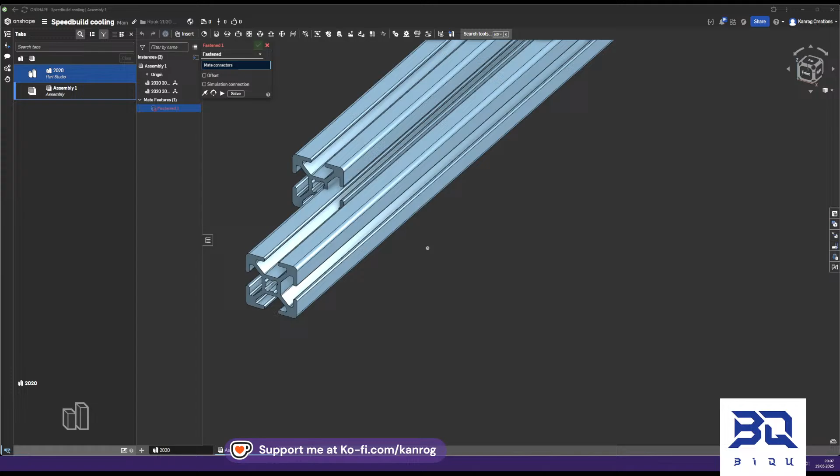Hey Jeffrey. Yeah, I'm talking.

Right now I'm just working on setting up my frame, because what I'm designing needs the frame to be there, so might as well just start with that.

And that's the wrong way. Let's tilt that way.

So first couple of minutes should just be a case of getting the frame set up, and then I'll start designing some actual parts.

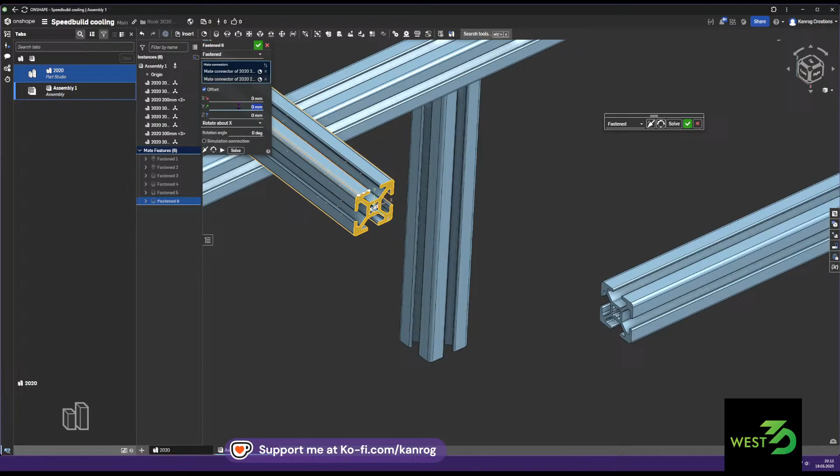The CAD is set up for perfect tolerance, so unless you can actually print perfect tolerance, you would need to adjust it. So I'd probably add a little bit of tolerance into the parts, but that should be trivial to do.

I usually design with zero tolerance, and then get that set up later.

I only have a couple of printers that can do the perfect prints, so you're not alone. Oh, dang.

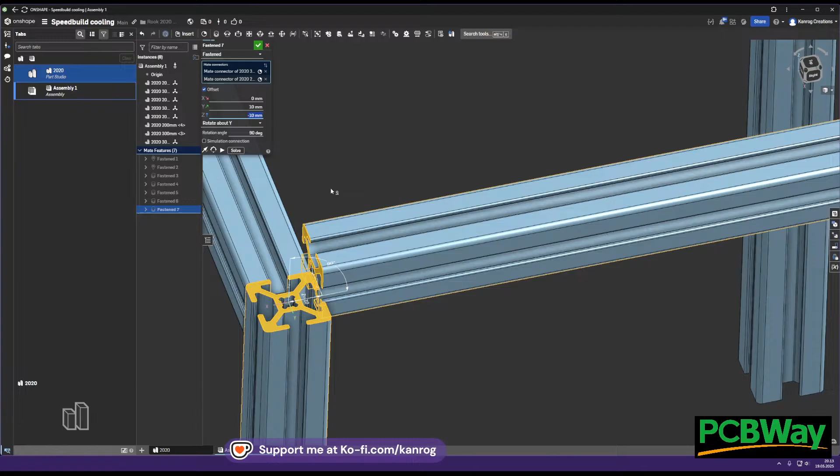So this is just a Rook frame, it's 200 by 200, but this particular Rook I'm working on right now has 300 millimeter Z extrusions, so it's a little bit taller.

That is pretty much all I need.

I don't often print tall, but considering the price difference when you're self-sourcing a Rook to go just 10 or 50 or 100 millimeters taller, I just prefer it. It's almost free print volume. Going 100 millimeters taller is almost doubling your print volume for next to nothing in price, so to me it just makes sense.

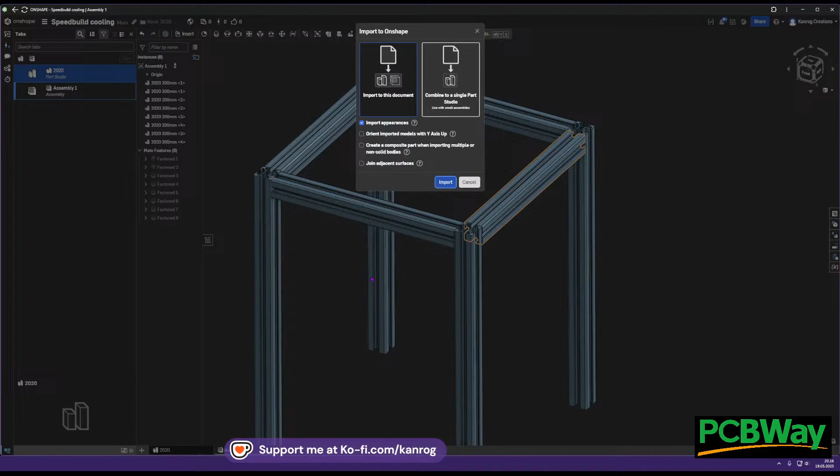Oh, that Rook for your niece sounds like a really fun project. The Rook was designed to be easy to build and fun to learn from, so...

Alright, so where is... let's just try to. I just want to reduce how much information is here.

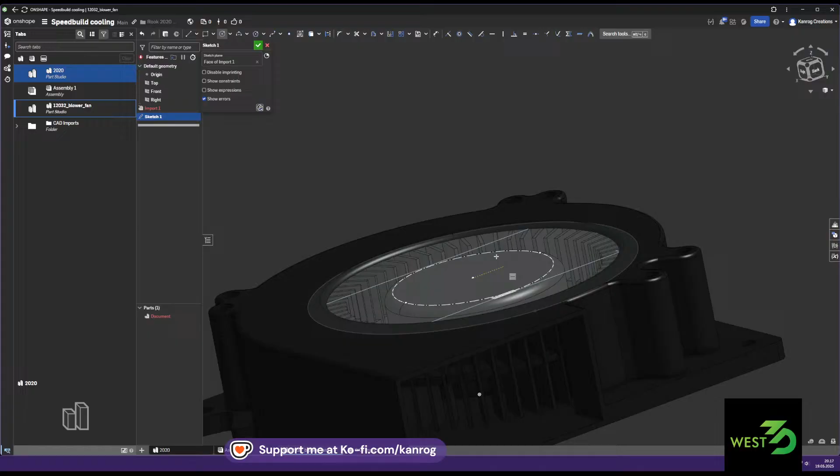I use a couple of different purples depending on the build. I've been using some LDO purple ABS, Form Futura PLA and PETG. They have kind of a, what is it, yeah, some sort of a dimmed down purple that I really like. It's what the printer I'm working on right now is printed in, that PLA actually. They have the same color in PLA and PETG, and I really like it.

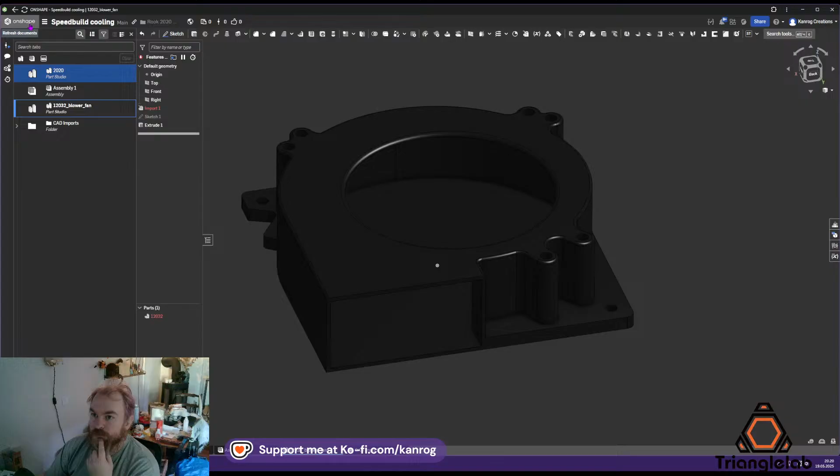I did build a purple and green Rook. That is amazing.

Let's see, I just want to figure out what happened to my camera here. For some reason it's just not working. Oh, it turned itself off, that's what happened.

So CF or GF filled, I haven't tried any other color than gray and black in those filaments, but if you want to build the ultimate Rook, that is what you need. My best and most reliable Rook is ABS carbon fiber and PET carbon fiber, it's just a super strong filament.

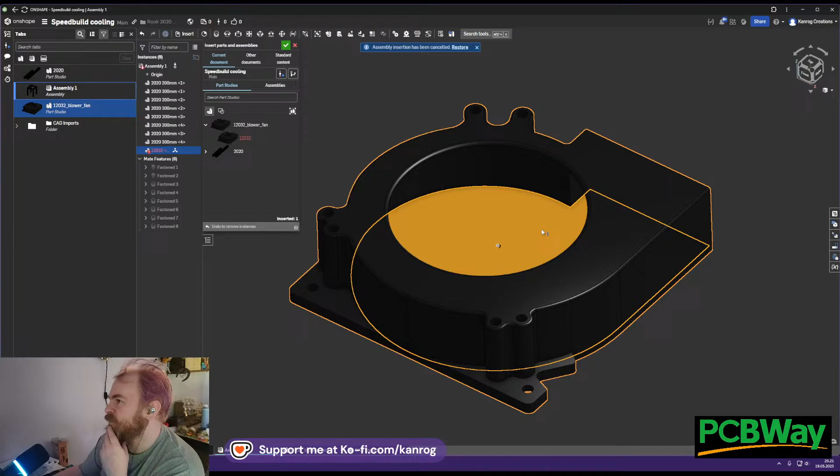Yeah, let's find another blower to put in there. Let's just delete that one.

Hey Nexus, how are you doing?

Demoing some Mexican tile, that sounds like fun. Hey Jeffrey.

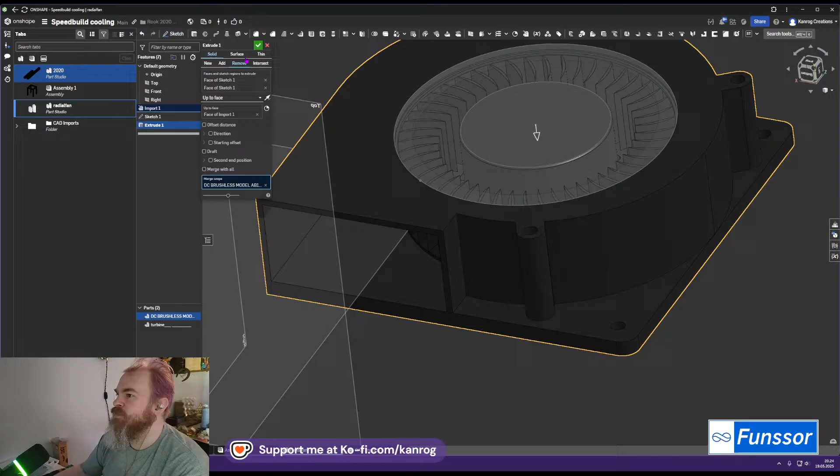Oh, well, that would simplify everything. I should start looking at stuff before I do anything. Yep, let's just rename that.

Hello, robot. How's it going? Lurking at work, yeah. Just don't let your boss catch you, I don't want to be the reason you get in trouble.

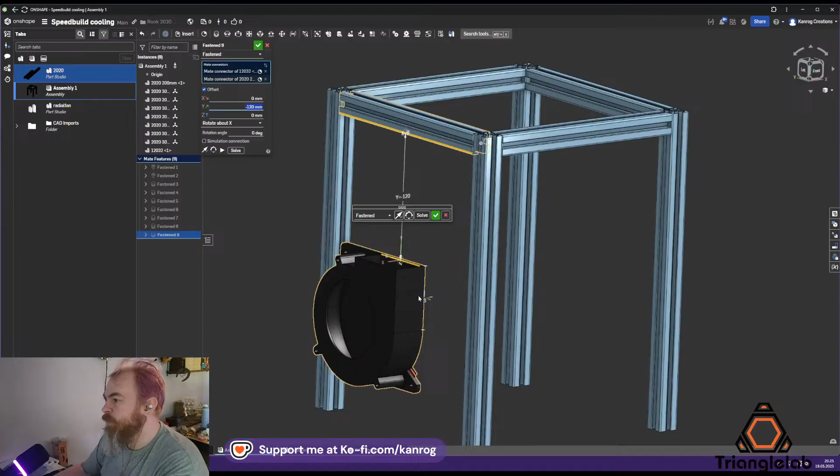So let's just do this. So what I'm gonna do is make a mount for this blower onto this frame, but I need that mount to be height adjustable because I want to fine tune the height of this. And then I want to make a duct that stretches into the bed as far as possible, but without getting in the way of the hot end that's going to be there. So let's start by just making that mount.

Blower mount. And that would be just a simple rectangle. Some screws, and then some screw holes, of course.

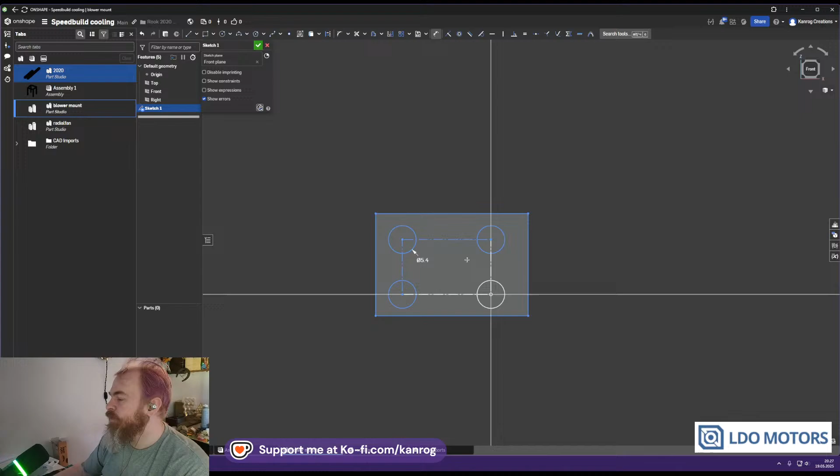Let's make this guy just always 10 larger. So that one's always going to be 10 larger, and that one's hopefully just going to be 10 larger too. And let's make that into like a... how big should that be? 5, let's make it 4. I can adjust that later.

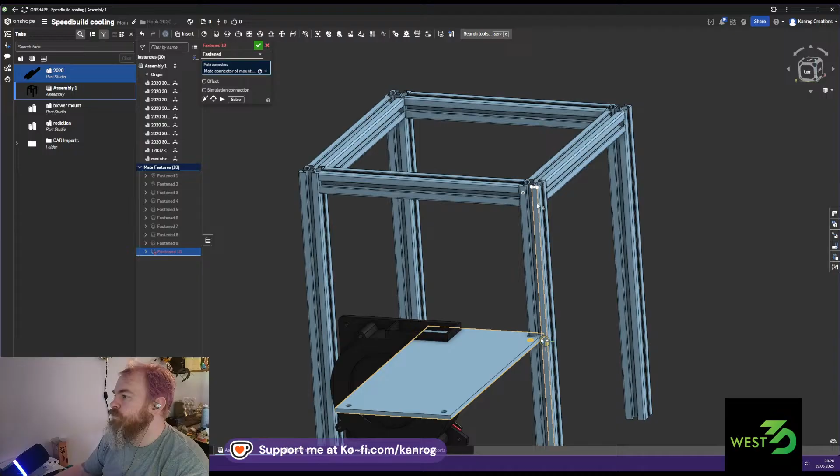Let's put that into our assembly. I think that is the run. There we go. Let's just pull that. 150, nope, wrong way. Okay, so do 20, that's close enough.

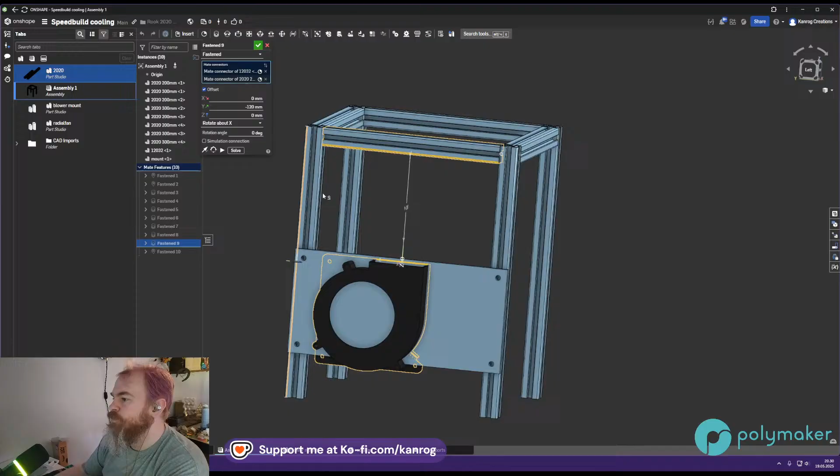All right, let's move this guy. Let's get this guy set up for some actual mounting holes. Let's see, how big is that thing? 120.6. So if I make this guy 130, minus 20, plus 120. This will make around 30 in total.

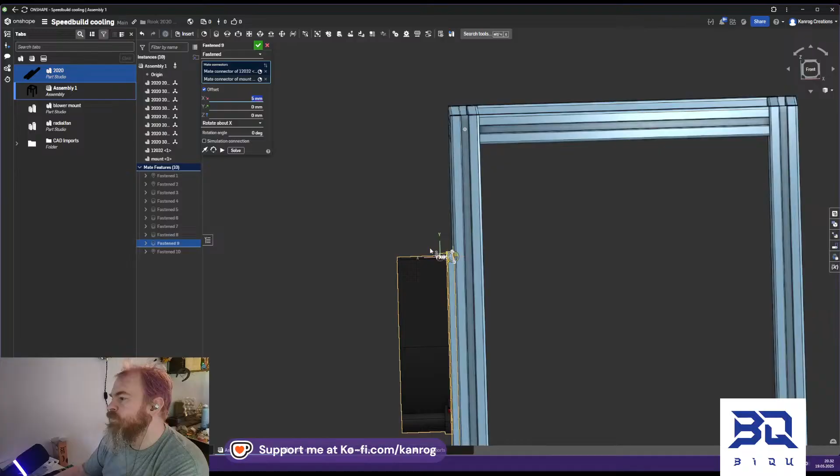And then let's go back and mount this fan to this panel instead of that guy. Yep. So I can shorten that by quite a lot, by about 20.

Let's actually bring this down to 10, 12, that should give us some room. That way I can make this just one piece and a piece that adapts to whatever cooling duct that I want to make.

So now I can go into this guy and edit. Let's get the mounting holes in. Those will be just M5 bolts, because M5 threads into these fans. So I'm just gonna make them 5.6.

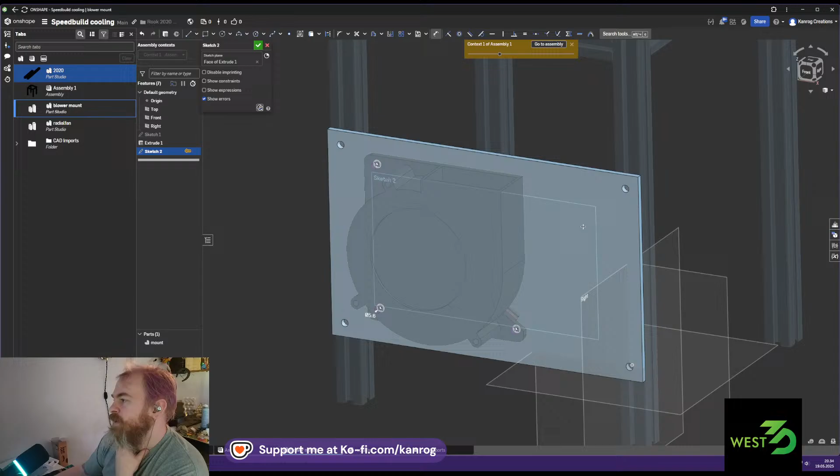Now, does this thing need to be this big? No. Am I gonna make it this big? Yes. Because it'll help with the rigidity of the frame, because this is going to shake it like crazy. But I can shorten it. Let's go here, let it update, and go back.

So I'm gonna make a mount right here for the cooling duct, and it's gonna be multiple pieces.

Hey Viking, yeah, it's going good. I wanted to get back into streaming, and I'm also back to making videos this week, so that should be fun, I guess.

Let's see. Let's get those two contacting each other.

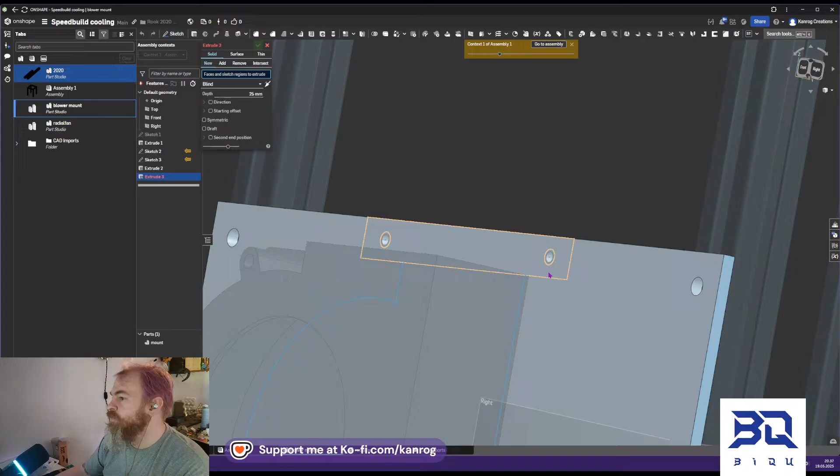So I'm just gonna punch through those things. Let's get that one back, and then extrude that thing, but as a new part. Actually, let's make that blind 5mm, because that's what I need to get the heat sets in.

Do I have a, what's the sketch? The sketch is, oh yeah, those holes. They're never punched. Okay.

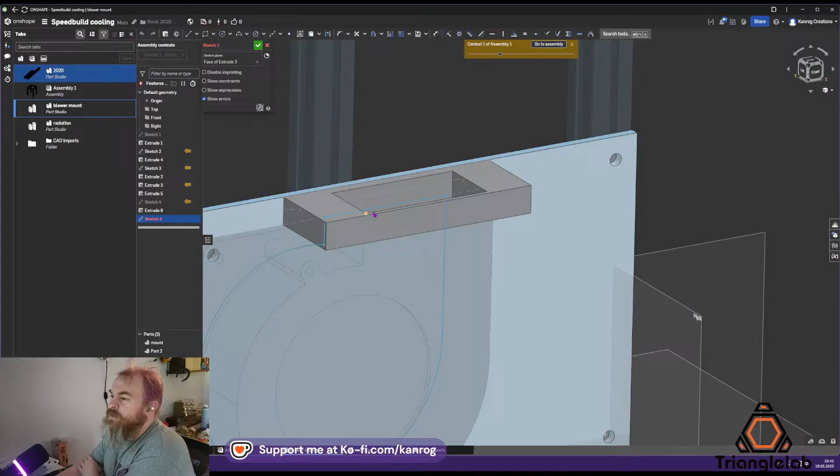So my plan was to just attach this thing to this thing, and so I just need one. Let's see, let's get this hole right there. And how big is that? That's 4.3, so I could put just M4 straight into that. So I'll just design some. And I know that I want to get that to 8. Oh, let's do 10, just looks a little better.

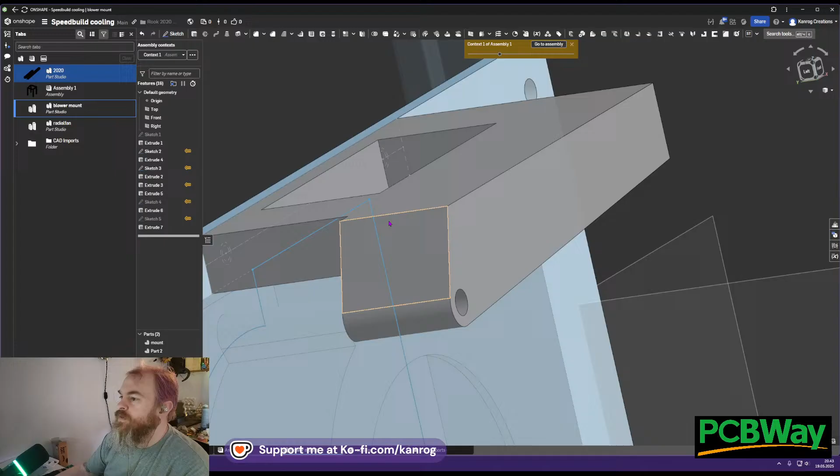Get that one in there, that one in there, and make those two the same, and then they're gonna be 4. There we go. And there we go. Let's make that like 4.

Now that's a simple part that I can print that will attach or hold that duct in. I'm just gonna keep on with that guy as the mid part.

Actually, I'm gonna make this part here thicker by a lot. That gives me a 3rd point of attachment, so I can do this. Yep. And then I'll put in a circle there, and a circle there. And those would be 4.6 for heat set. Yep.

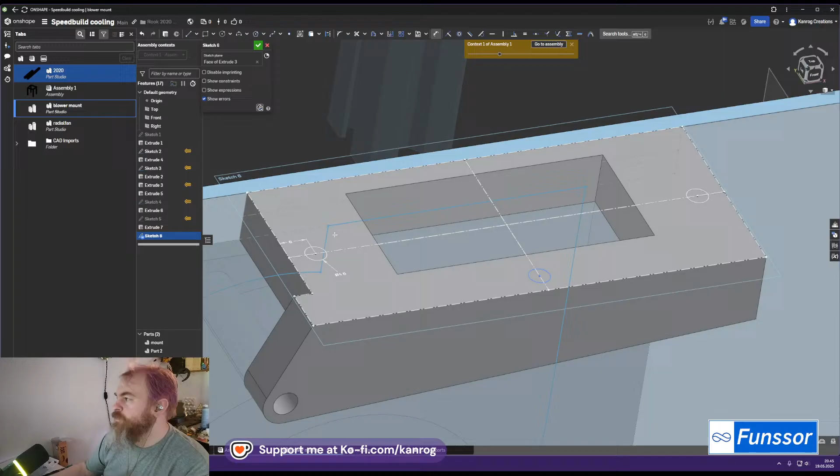Okay, let's make this into something that looks a little better. First of all, let's just make that nice and pretty.

Now I want to make this guy. It's very Rook-like, just not adding chamfers to this. It's just very Rook-like, but I just can't make myself do that.

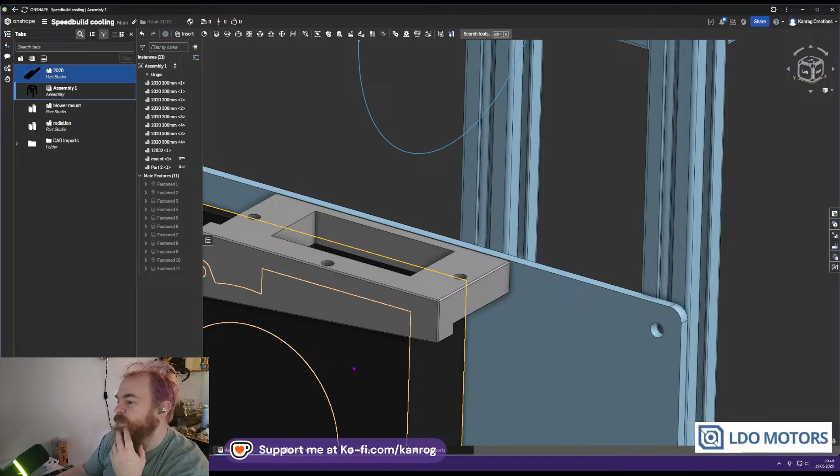Let's make a new part studio just for the ducts.

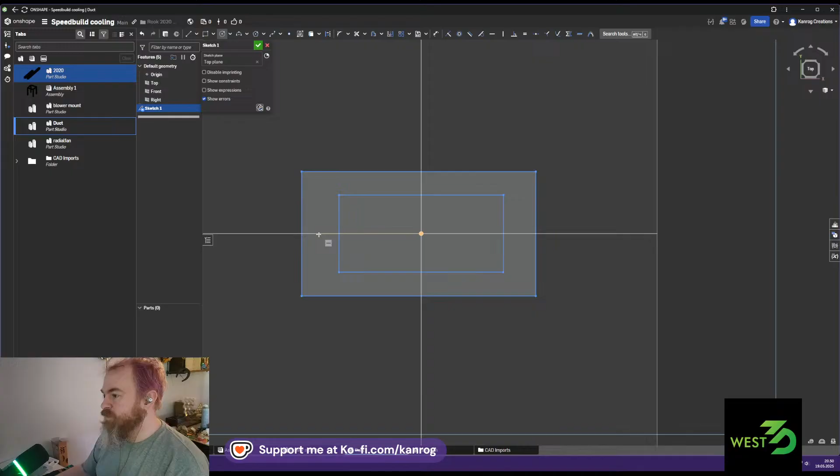I'm really pleased with the rook, just in general. It's a really fun design.

Let's get this guy set up.

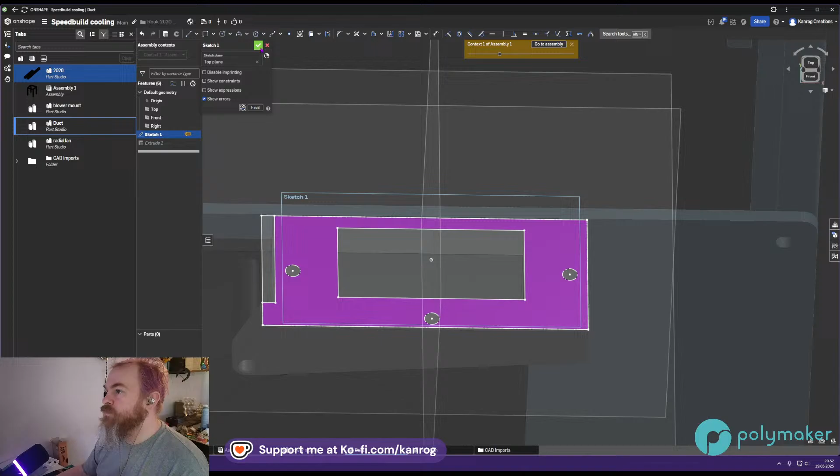I did something wrong there. What I should do is use that. Gonna just do that instead, I think that would give me a good result. There we go. So now I can make that one fit to that one instead. That one fit to that, one to that one. And then here I'll just make a new line. Yep, that's better.

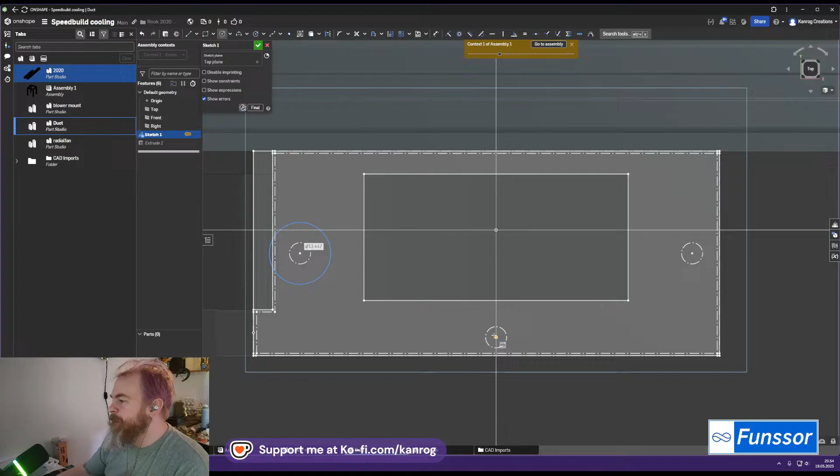Yeah, beard both longer and more gray. It just keeps going gray, nothing much I can do with that. Hi, by the way, Nutty. I wouldn't say lost weight, I'm just eating better. I've been eating better lately, or not lately, the last year or so.

So two, so that'll give me something to just bolt into that. And then, just because it makes everything easier, I'm going to do this.

Thanks for the compliment.

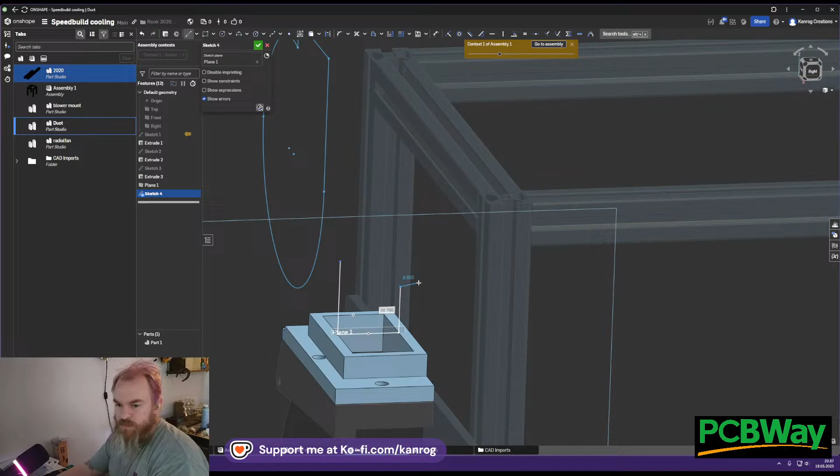I have another mount that is compatible with the Rook. That's how I did mine. But yeah, that's something we could look at when we get to redesigning, if we do that at all. We're not sure yet.

Okay, let's get some measurements in here. So from there to there, let's go 25, we can actually go 30. And then I want the duct to start up here, 40, and I want the actual vent exit to be 10. So what I need to do is make a nice curve from there to there, and I want to make sure that the air goes straight out there. So I'll do a 15 and a 10. So now all I need to do is connect those two and make a nice arc. Connect those two, make a nice arc. So let's do that.

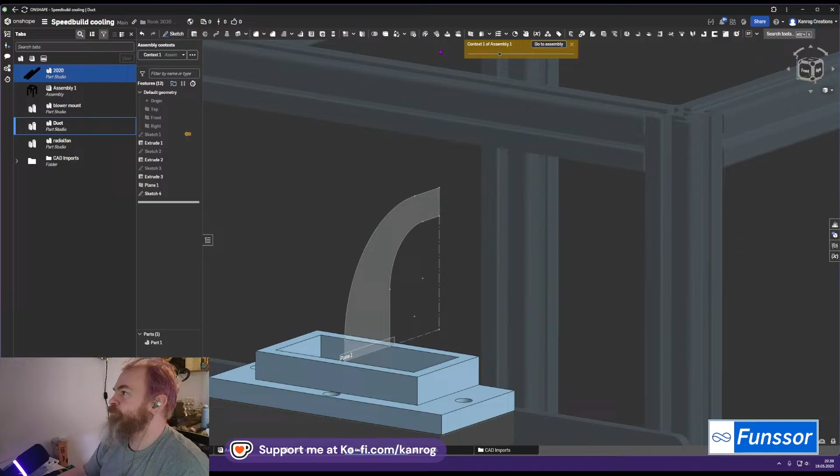There's a couple of ways for me to do that, but this is the simplest way that I can think of. Just do that, then put that and that on there, and this guy, let's make it 100 - the bed is 120. This will just make sure that I get nice coverage. I can probably make it even smaller, just because it's gonna force itself out, spreading.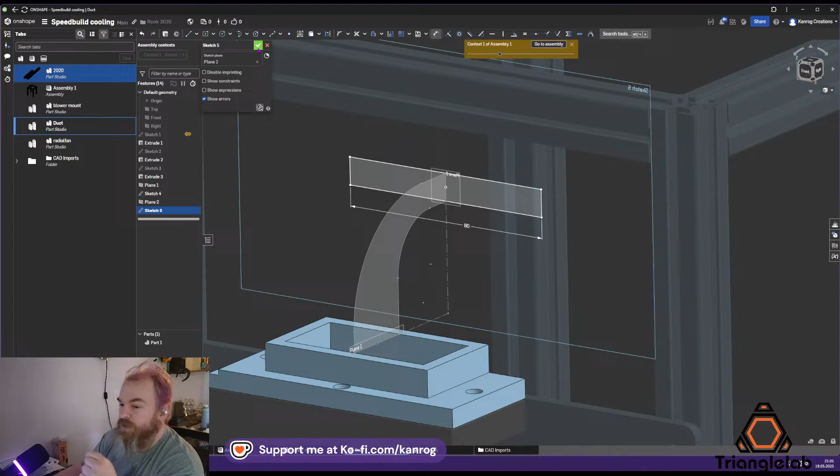Status with Pegasus is kind of limbo at the moment. I don't have the parts or the energy to build mine, so CAD is pretty much there. There's a couple of places that needs tolerance adjusting, but the CAD is there. The main issue people have with the Z-belts are the apex clips, and that's something you can solve by making your Z-belt clip, the actual apex clips, slightly thicker. I've been experimenting with it myself, and I had to get mine from the stock size, 2.9 millimeter, and I got mine to 3.2, and I can lift anything with that. So if people are having issues with the apex clips, they just need to change that.

Just thicker clips - it's all about your flow tolerance on your printer. All right, so I need to get that one connected to that one, and that is probably where I'm gonna end up.

This is a visual guide for me to help me see where the duct's gonna end up looking. So now I can just make a loft between that guy and that guy. And let's add in some good looking profiles. There we go. No.

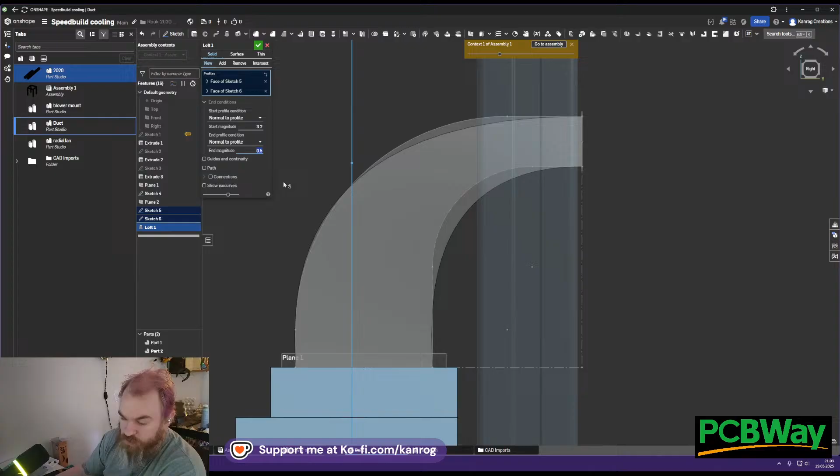Let's do 3.2. I can actually shorten down that one. 0.6, 0.5. Yeah, so if you want to be smart, just print the exact number of, or a couple more, clips that you need at the stock size, and then go up 0.2 and then one more, up 0.2, and see how they fit. If you get them right, you can lift the printer from that stuff.

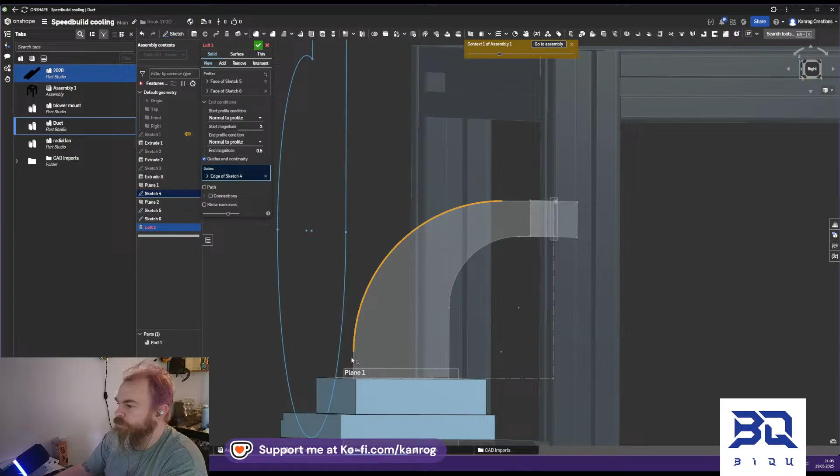3.53. No. Let's see, can I match? No. Let's just do that. I do like that shape though. It ends up just looking really weird. Yeah. Nope. I like that. Might be.

Yeah, so that is my path. So I'm just gonna make this guy. Oops. Go away. I'm gonna make that just bright red, so that I know that is my path. So I need to make something that's bigger than this.

Yeah, I don't really do CFD. I haven't felt the need for it. On this guy, it's brute force - I'm just gonna use more fans. There's gonna be 3 of these on this printer, so... and CPAP. So on this guy, it's more just brute force.

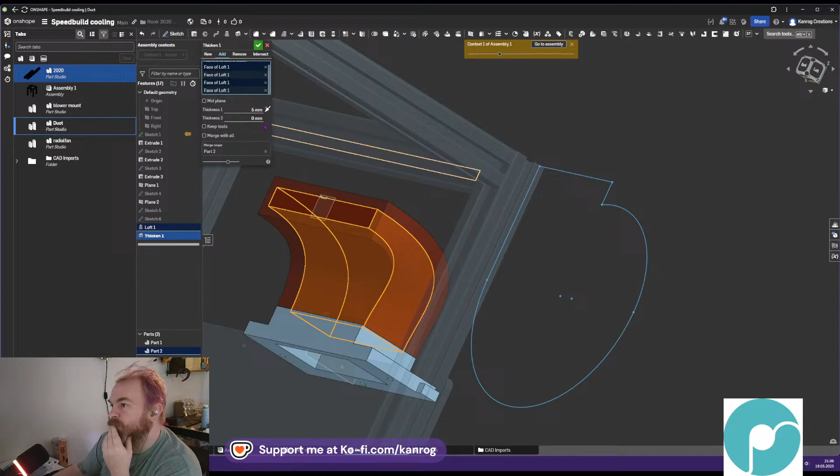So should I just... I could do that. That'll be difficult to print. Actually, not really, no.

So if I now do... I never have issues with adhesion. On this guy, it's probably gonna be an issue, but I do have glue that's powerful.

So I can now grab that one and just add them together. That is not a difficult print at all. I mean, I could just fill in this void. It'll be support free. Should I maybe do that? Super glue, yeah, super glue would work well.

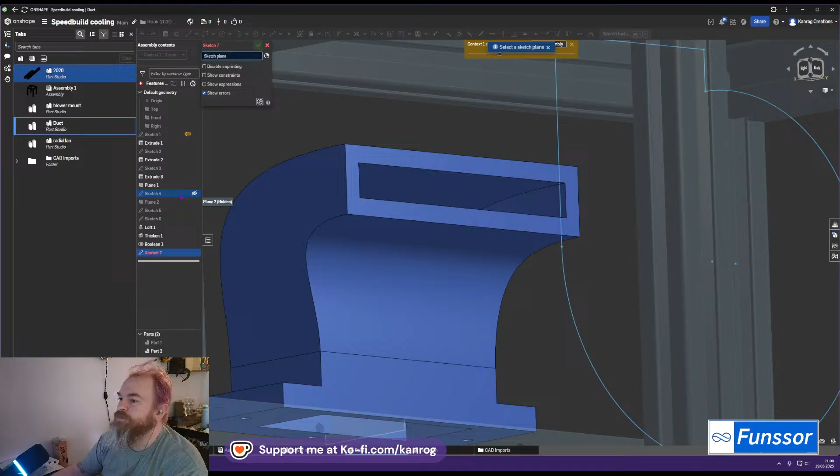I have a couple of types of bed adhesion that does work really well. So I have this plane still. No, not that one, that one. So what I can do now is I can just fill in that, and then up the face.

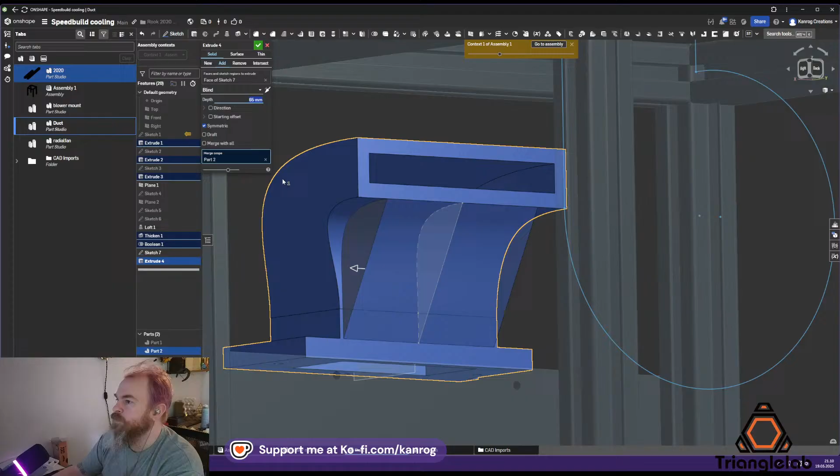I'll do that, and then have fun with them chamfers - make it look fun, doesn't have to be boring.

I feel like this duct is very un-Rook-like, there's a lot of curves and stuff. I'm almost tempted to just build something around that duct. Then again, this would be so much easier to just print and use it.

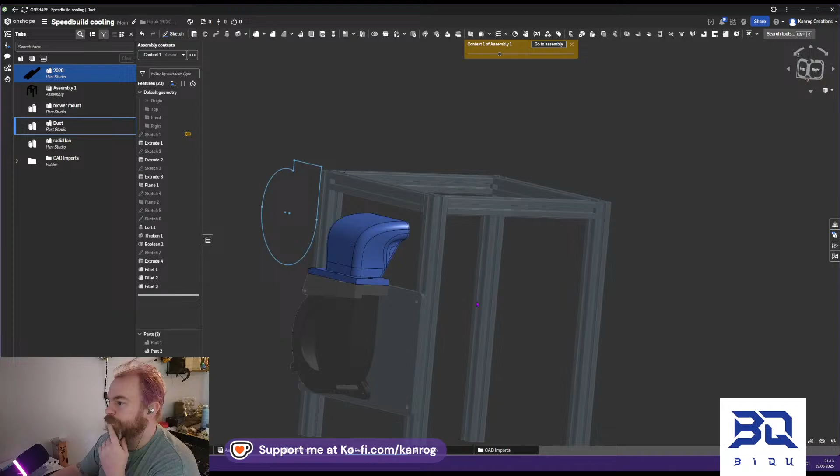That is looking really good. I could probably just reinforce this connection a bit, but I don't think it's going to be an issue. That'll be nice and easy to print, standing up. So I can do all the chamfers, make it nice. Chamfer everything - oh yeah, of course that one doesn't work.

Oh yeah, house renovations are not fun unless you really are a psychopath. I did have fun when I did it, but I am a psychopath, so...

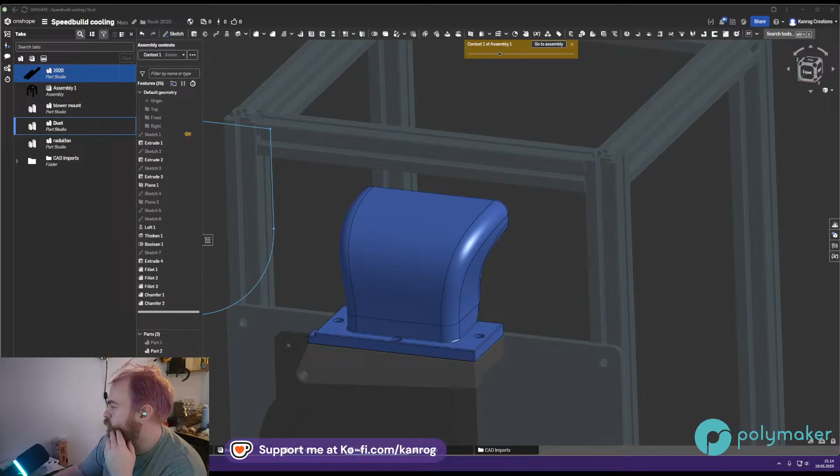Okay, not that. All right, that looks good. All right, that is looking good.

So I'm doing it this way with this extra adapter, just because it's easier to mount things together and get a nice seal. And then I can adjust this duct if I want to - I can just add stuff to it later on.

So for printability, I should probably add in a couple of things on the inside here. Let's do that. Let's make a new plane point.

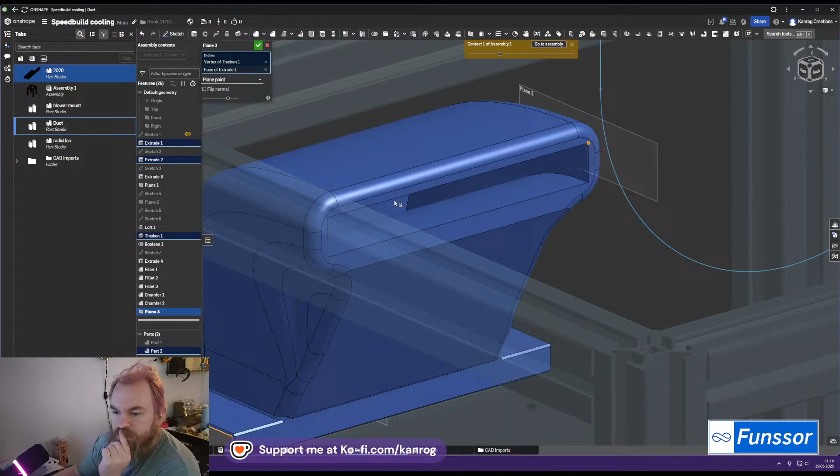Oh, that's interesting. I don't actually have one flypie light, so I might try that then. Not that setting up a flypie is difficult for me, at least. It's routine, but that's interesting. I'm gonna have to look at that.

Hey Jeffrey, welcome back. The painful part with a duct is finding out the right height. The thing about this printer is I have a lot of room getting everything up and down correct. I don't have to worry about the top at all because the hot end sticks down to about here on this rook, so I can slide this entire thing up and down super easy.

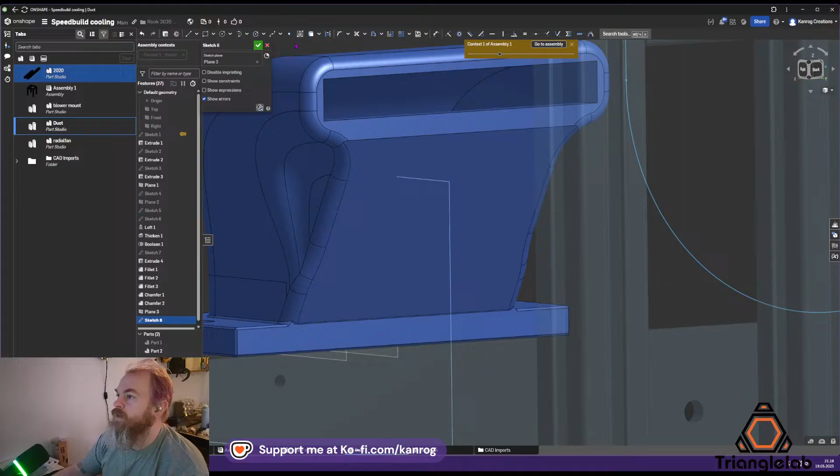So what I'm gonna do is go in and find that plane, and just make offsets from that. I'm gonna make one offset from that plane. Now 25 is gonna be too much. How about 15? Yep. And then I can start sketching on that and just add in that, and that, and that.

Hey, shrimp farter. What kind of speed? Well, all of it, hopefully.

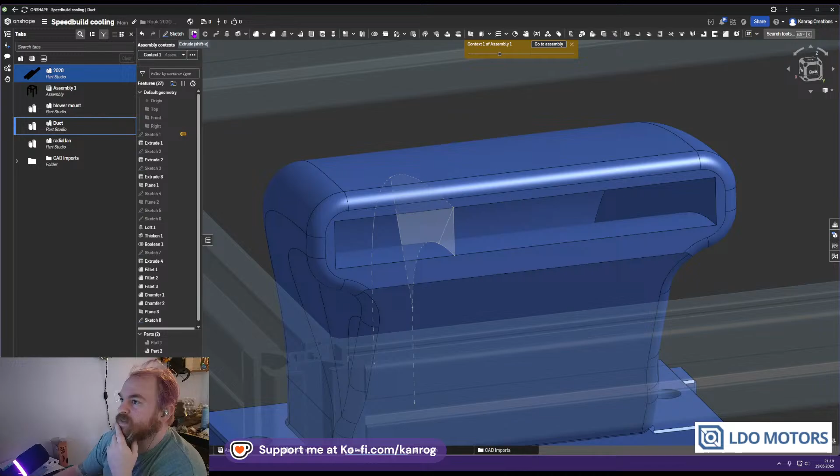The goal is to get within 2 minutes. I'm currently at 350 on this rook, so if I can get under 3, into the 2s, I'll be happy. It's gonna be difficult, but I don't think it's impossible. I have the hot end to potentially go faster, so if all my experience is telling me anything about the parts I'm going to be using, this is probably going to be limited by the actual rook motion system for once. It's probably the first time it's ever going to be the limit, which is fun.

Is it just me? Is there a... No, it's not. I thought there was a gap there, but there's not a gap. Let's mirror some features then, and mirror it on... where's that plane? No. There it is.

That should make it easier to print. And now I'm thinking maybe I should just add that feature a couple more times.

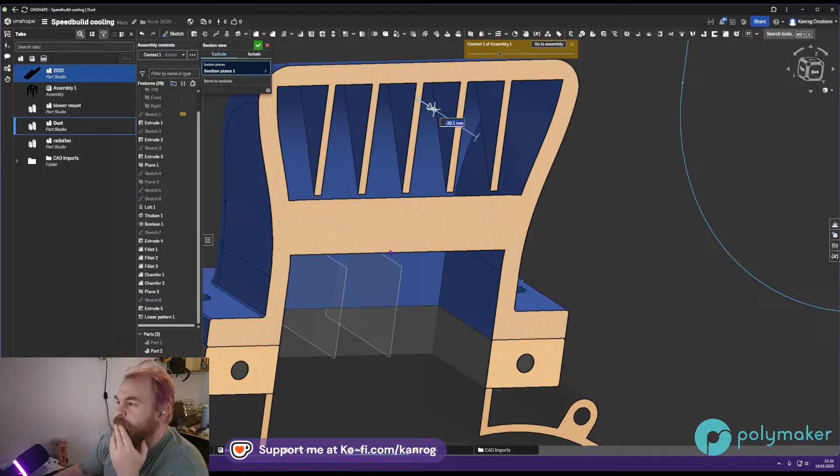Actually, let's see here.

Wasps are not fun, but in general, if you just leave them alone, they tend to leave you alone. So...

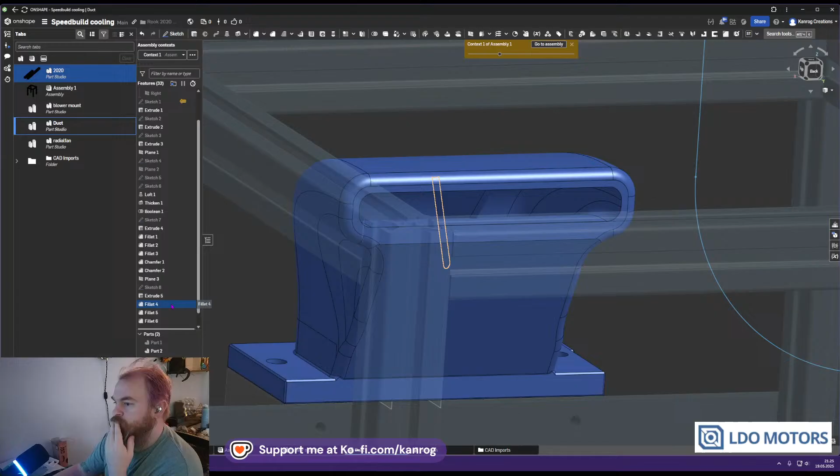That'll make everything easier. Why doesn't it give me the features? Oh, okay. I guess I'll have to add them manually then. Oops. There you go. Now that looks better.

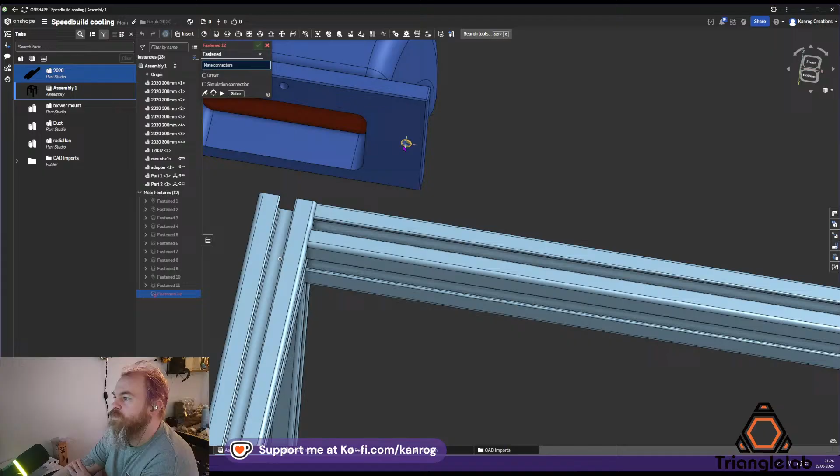So how's this gonna look then? Let's put that thing in. Oh yeah, this. I need to fix this issue right here. Oops. That needs to be solved, but that's pretty easy. I can smooth this out a little. Or do I care at all? That's the issue, maybe. Okay.

Let's try this. I'm not sure exactly why, but it's mostly a taste thing, and Fluidd has a bit more technical built in.

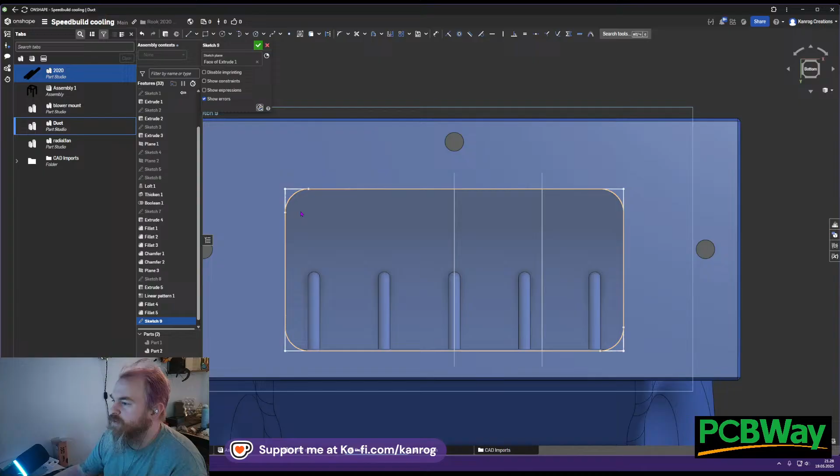Mainsail is just more smooth in its use. Why? I don't know. I don't mind using either. I'm perfectly fine using both of them. So let's...

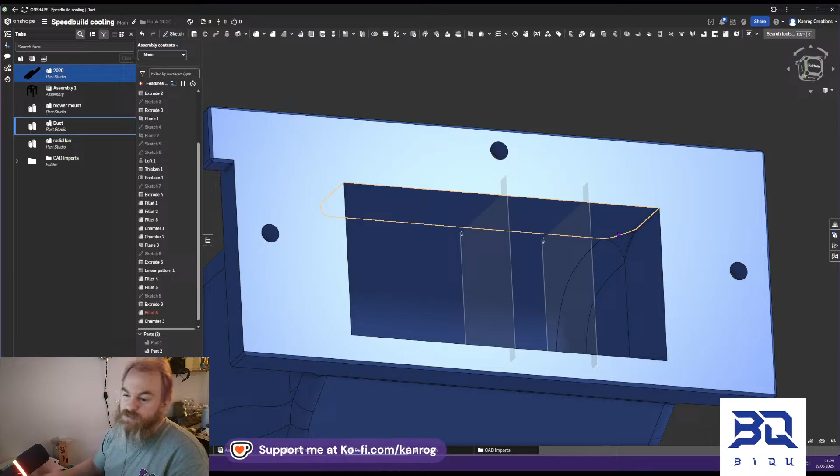I get where you're coming from. It's a little bit different, yeah, but it's not hugely different. It's still the same base functions, still just Klipper. Fluidd has some features that make it better, especially if you're looking at the text editor that comes in Fluidd. It's been way better than Mainsail for a while. Mainsail is catching up though. They've updated their editor right now, so you have the features on your right. I don't have a printer... actually, yes, I do, I can pull it up here right now.

Hey, Rollo. Yeah, Fluidd's had that for forever, more or less. That's what made it kind of sort of special, I guess, that and the fact it was a little bit more laid out.

So I'm not sure if this... I'm just checking a printer on my other screen here. Yeah, this one doesn't have it. You see, this one doesn't have anything on the right side of the screen. But I'd bet if I update mainsail on this and mainsail config, it should update. Let's just do it.

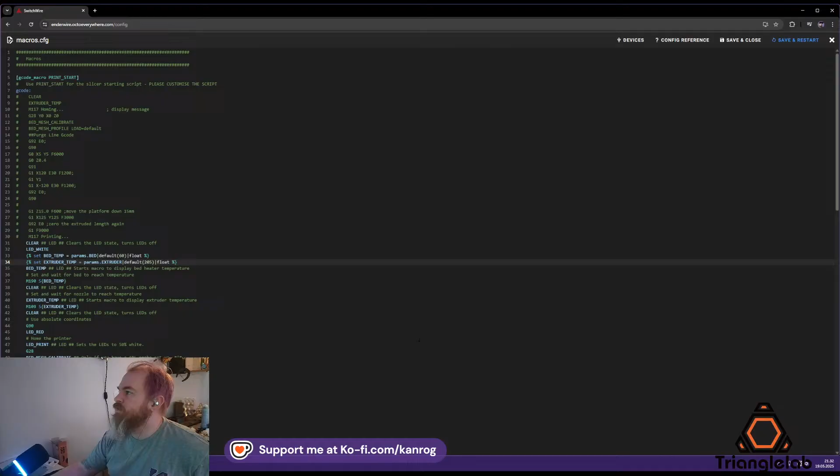So let's look at this. Still not. Maybe I need to update the web client or just Klipper itself. Here we go. So now all the sections have a list, so you don't have to scroll to find something, you just have it here. If I look at the extruder, I can find the pins - it just makes it easier to navigate. Fluidd's had something like this for a while. 10 out of 10 update. I do agree, yeah.

Ooh, let's add some printability to this. And I don't want to chamfer this edge because I want it nice and smooth on the connection. Yeah. Not sure what I wanted to fill in here. Well, let's just use it for something that I wanted to do. So, all right.

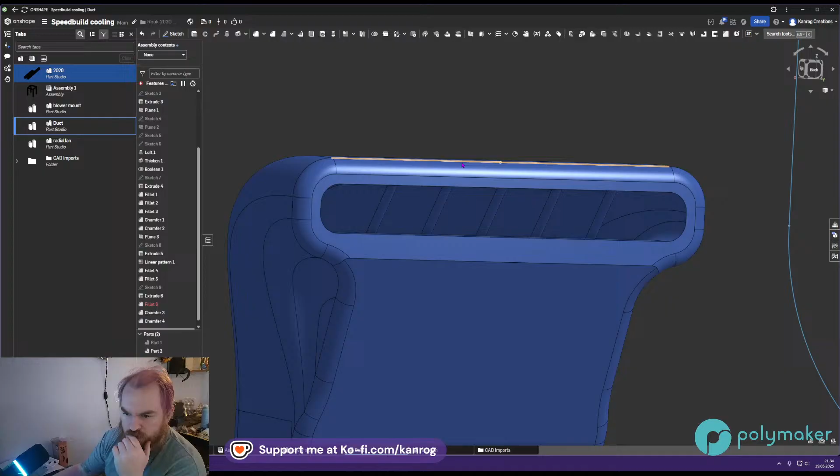Mainsail was first. Well, that makes sense. It has been, Mainsail has always been like the one that people use. I think Fluidd is more like the Linux of Mainsail front ends.

One thing I just realized is that this thing is way thicker than it needs to be. It's 5 millimeters thick. It doesn't need to be that thick. How much of my work am I going to destroy by doing this? Not a lot.

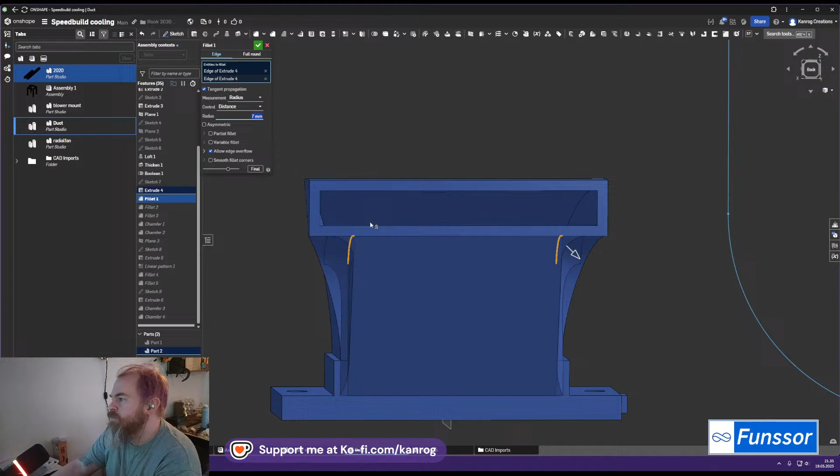Oh, there's no contact here anymore. That makes sense.

Let's see, that guy and that guy, 60 degrees, that's okay. These guys can just go bye-bye. Oh yeah, that changed a little bit. This guy needs to be tiny. Actually, not there at all.

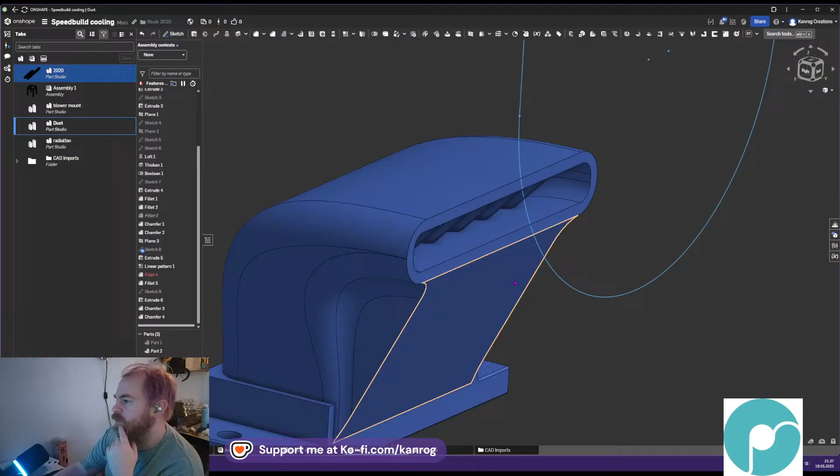Yeah, you can just use the section view, so you can go through your design this way, or you can just select another face like this one, go through it. If you want to go top down, then we can select this guy. So this way I can see how it's going to be when printing.

And I might add in a hollow piece here just to save on print time. Might actually be a good thing to just add in that hollow to make it easier to print. Or do I actually care? That's another question, I guess.

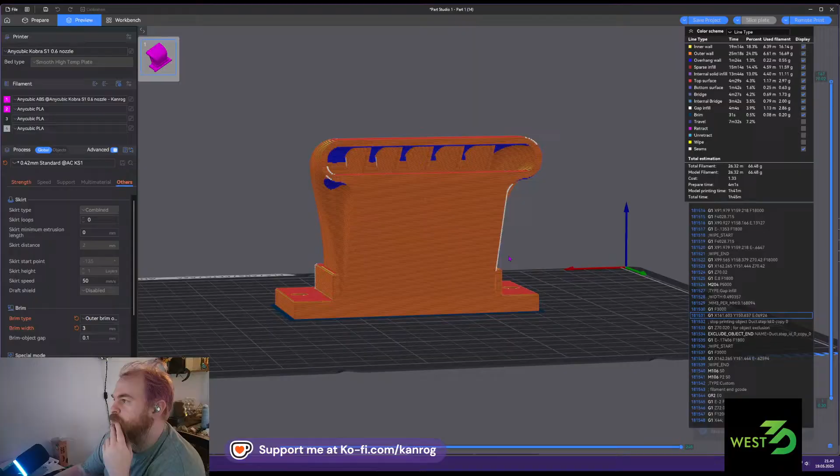Let's see. It's set to ABS. I'm not going to print this in ABS. I'm going to print it in PLA, but I just want to see how it looks like. Yeah.

Nice and simple overhangs. So if I now go to set it to like 4 walls, I want to keep the infill at the bottom there. So I'm just going to add a modifier. Let's add a cube modifier.

Move it up. Oops. And that one should just give me 0% infill.

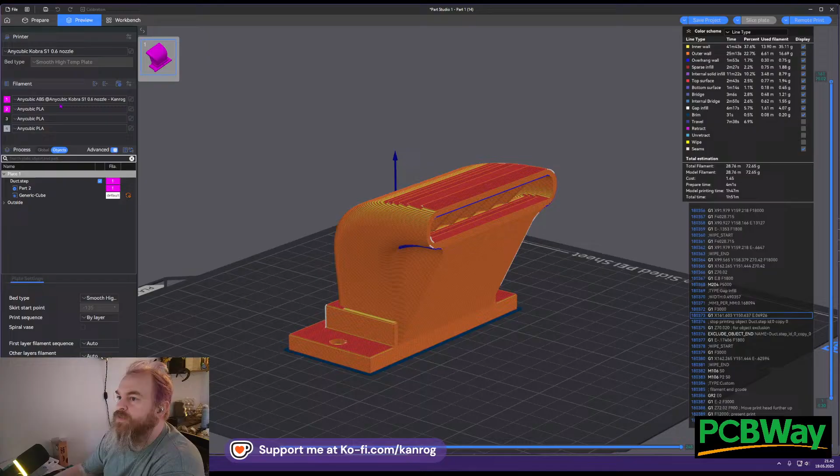Yeah, that's pretty much perfect. You nailed it, Nutty. Nailed it. So I'm just gonna have to load some PLA into this guy and then print, I guess.

Fans, shroud, exit bottom. Oh, you mean these guys?

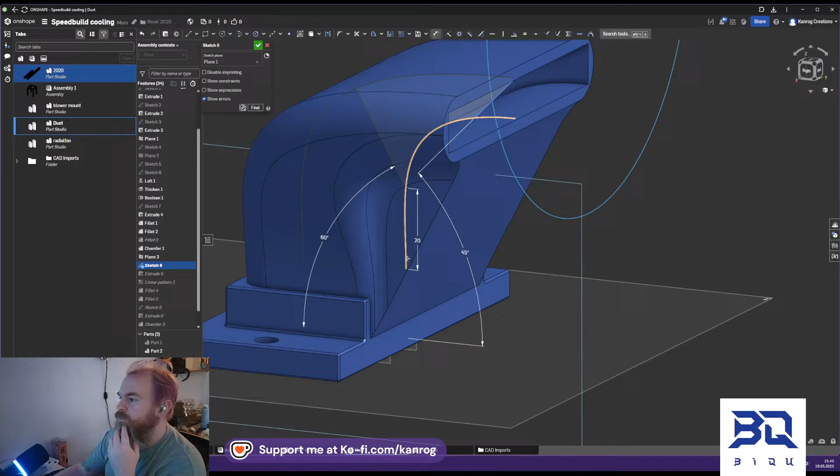Fix this. Yeah, hold on. Let me just quickly fix this. This just annoyed me. There we go.

Just to be safe, let's get the new part in instead. Yeah, that's gonna be fine. Yeah, that'll be completely fine. But I'm gonna get the new one in instead.

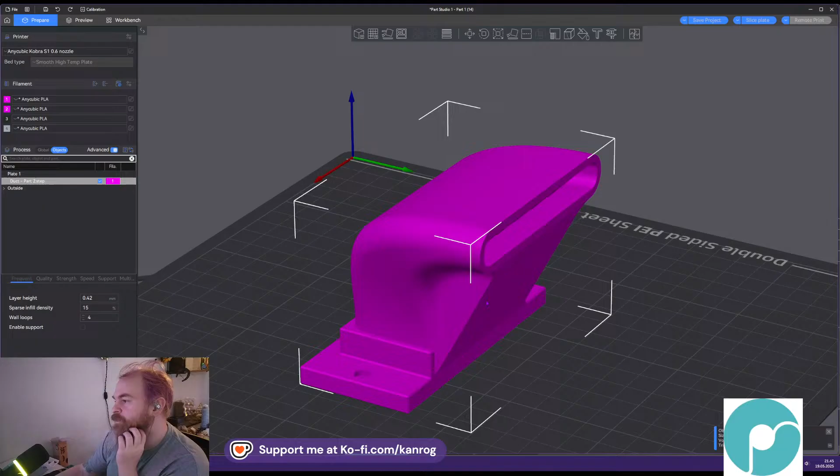And then add a new modifier to that. Don't show again. And 0% slice. Yep.

All right, that looks like what I needed to do tonight. So I'm gonna go play some video games, and print this, and also need to print the panels. Let's have a look.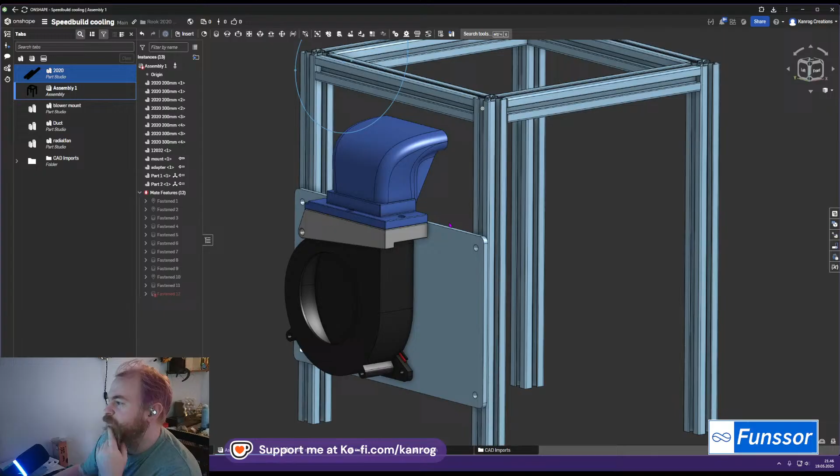And then I'll put it on the printer tomorrow. I'm currently making a video that should be out early next week about this printer and see how fast it goes. The printer is mostly built. I just need the cooling set up, and then Klipper.